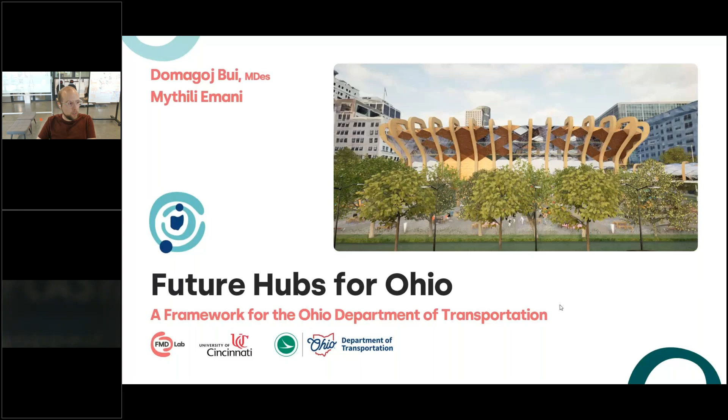We are from the University of Cincinnati. We both and the rest of the team work at the Future Mobility Design Lab, which is kind of like a consultancy at the Digital Futures Building, a Research 2030 initiative. We work with partners from government, industries, nonprofits, communities, wherever you can name it, to do human-centered research and design using our mixed research methods and technology to empower people and imagine a better quality of life in the future of Ohio, the US, and internationally.

This grant was a 1 year, $100,000 grant for mobility hubs for improving the access, safety, and economy in the future in Ohio. Based on this, we've also been able to secure 2 more ODOT grants for the next fiscal year worth 300,000. And all of this, of course, with our director. I can't forget to mention Professor Alejandro Lozano Robledo, who will hopefully be saying hello at the end of the presentation.

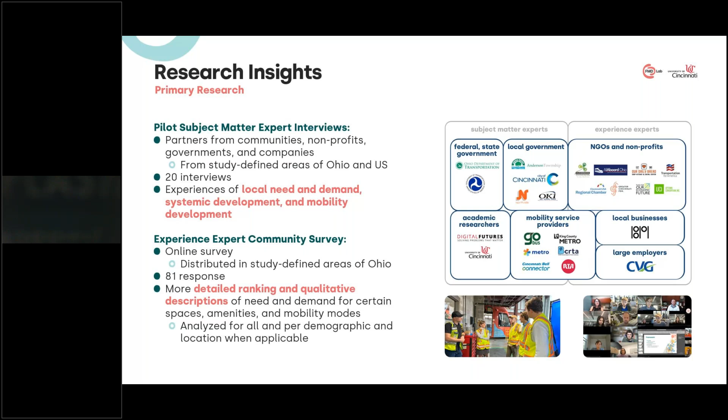Going from there into the community survey, or what we call experience experts, the users: it was an online survey with more than 80 responses all over Ohio. Thanks to Drive Ohio for helping distribute the survey, even in places where we couldn't reach otherwise. It produced a detailed ranking and qualitative descriptions of those needs and demands, which with analysis helped us define the structure of how we were going to proceed into the second phase of designing mobility hubs.

The third pillar of the research was multimodal data collection. We found transit and amenities data on two different databases, mapped them in GIS thanks to our partners from the UC Infrastructure Institute, and then together we weighed them using the survey and interview data I just covered, to weigh the mapped points of interest. This framework shows how the mapped data fed into a framework developed based on the weights from surveys and interviews, sifting through proximity.

So what should be located close to the hub, what should be connected to the hub, and what is missing in the location that should be addressed in the hub. It helped us find strong places in areas we considered for the case studies, to actually triangulate and get the actual location.

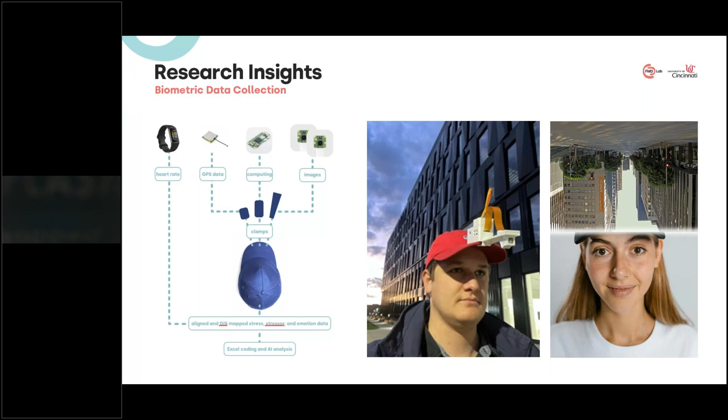With AI analysis, this tool can help us determine, while walking on the street, driving a car, or riding a bike, what the stressors are, so we can take the interventions with the mobility hubs further.

What we developed here is firstly the hubs matrix, based on three different parameters. First is land use, which we defined as rural, suburban, and urban based on research. The second is levels, based on the amount and purpose of trips: local, so a neighborhood hub, and central, more of a gateway downtown hub.

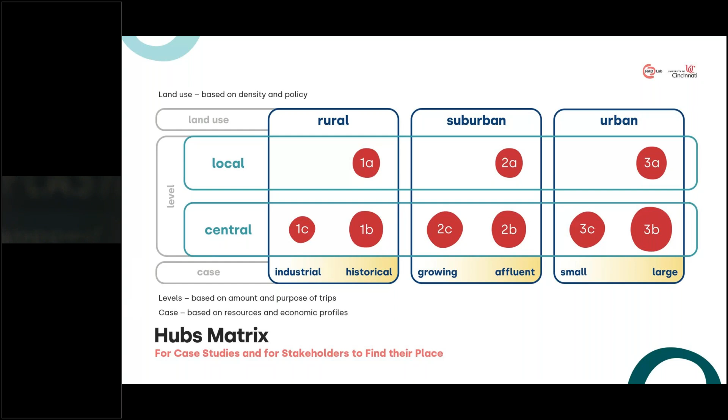And finally, the third one, case, based on resources and economic profiles: in the rural area, is it more of an industry-based economy, or a tourist, historical one? In suburban areas, is it a growing suburb or an affluent, stagnant suburb? In urban areas, is it a small city or a large city? Based on the data, we defined these to try to cover as much of Ohio as possible, so this matrix can later be used by anyone to define what kind of hub they need. More on that a bit later.

And finally, the translation framework. Moving on from research, we took the data and insights, developed the case study requirements, and used those requirements to make them visual, to make a flexible basis for what's going to be the best childcare example, the best bus stop example, etc. We framed it in the context of each hub, and you will see which those case studies are.

And then we used that to design and plan, iterating on the concepts for each case study, and finally created digital twins, simulations in 3D space, going live, of what those could look like. More on that here.

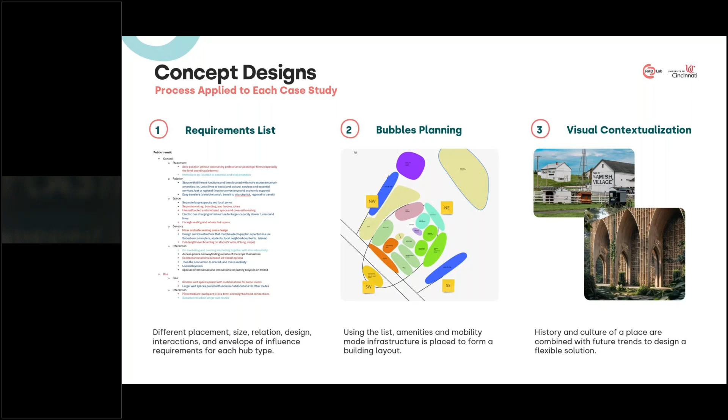First was a requirements list, bubbles planning, mapping the mobilities, mobility modes, and amenities in a footprint, and visual contextualization, using historical images of culture together with futuristic ones to imagine what these hubs could in the end look like.

We also used some new technology for this. For example, we used Gravity Sketch, a collaborative 3D sketch tool inside a virtual reality headset, where all of us together in the team could bring the 2D plans into three-dimensional life.

Second was StreetMix, which allows using NACTO guidelines to design street profiles for every specific street we wanted to. And finally, Vizcom, an AI tool that you can feed images into; we fed some very rough CAD models of our designs to see how they could look and whether we could go forward with the designs.

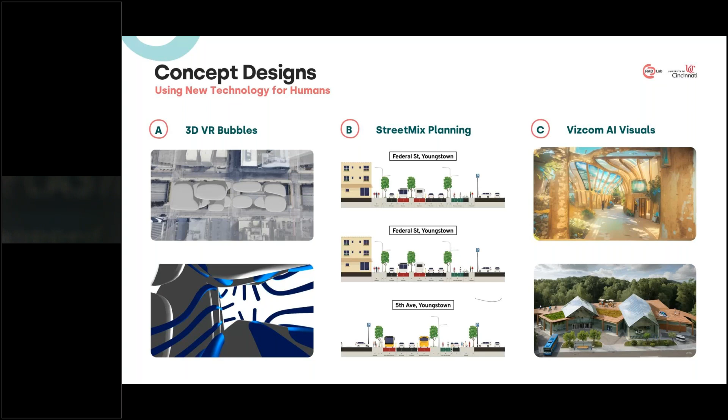Finally, the digital twins framework: the digital simulation of an existing space where we add our design, our concept, and new assets like new streets into it. We use it for research and design validation, and later to showcase to stakeholders, use in workshops, and for decision making as well.

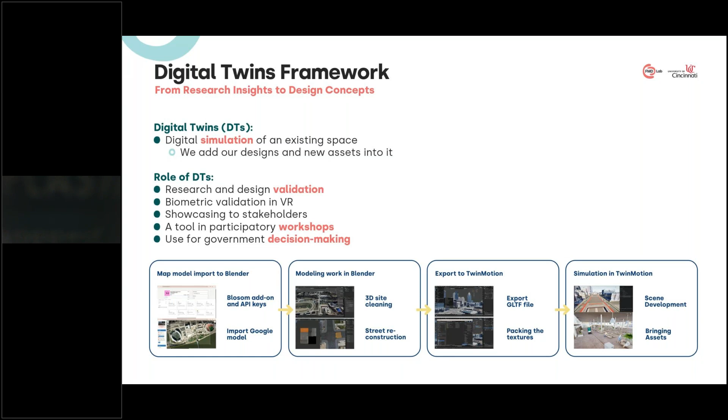You can see how this process went all the way from importing 3D Google models of the space, cleaning it, reconstructing the street, adding our concepts, and developing the scene with new assets.

And finally, before we go into case by case studies, in general, what are our recommendations? What did we learn from all of this? What did we conclude? You will see later, we developed a kind of toolkit, a playbook, which anyone can use, where all of this is in.

But what should these future hubs for Ohio be? Firstly, well-connected multimodal spaces and community-oriented places, both at the same time. What does that mean? Spaces where people can transfer, switch mobility modes safely and comfortably, but not just a transfer point, also a place for placemaking, where communities can connect, grow, relax, and have public space.

And they're important because they are community economic development tools. A lot of research shows just how much, especially even in rural areas—and this is probably one of the first case studies of this sort in the world, looking at mobility hub networks in rural areas and connecting rural, suburban, and urban areas. Especially in rural areas, bringing amenities and mobility closer to people is such a huge economic development tool.

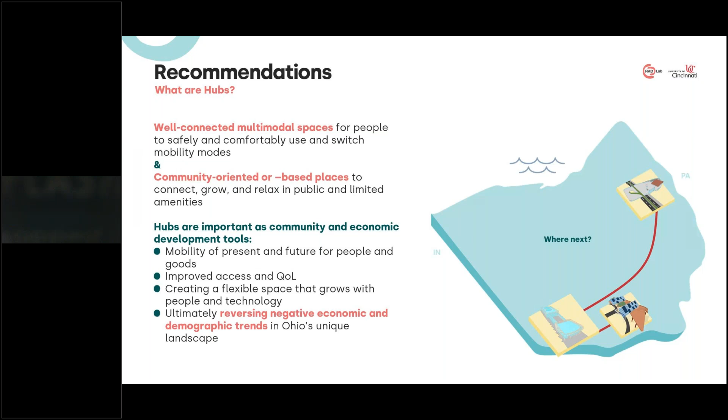Hi. The way that we envisioned the development of the hub was in almost a building blocks way, almost like Lego pieces layered and put together. So the process would start with choosing a location.

Using primary research data collection methods that Dom mentioned, like surveys, interviews, and site visits, we can determine the need and demand, which would ensure that the hub that we build is actually usable.

The second step would be to ensure that the hub design is based on user needs and the context of the location, so connecting the site to its surroundings. It's important for the hub to assimilate into the area and meet the needs of each community it serves. A hub designed without consideration of where it's being placed would lead to community residents not actually adopting it.

Third, mix and match the amenities and mobility—creating the right recipe with amenities and mobility modes in the hub we design. It's important to consider the demographic and transportation patterns that already exist in the area, so the hub provides relevant services. And choosing the right mobility modes is also important to provide flexibility and accessibility.

As an example, for a passenger switching from rail to bus, creating a space or connecting point for seamless transitions between modes of transport, or even creating a pleasant waiting space, is important. And fourth, creating a pleasant experience.

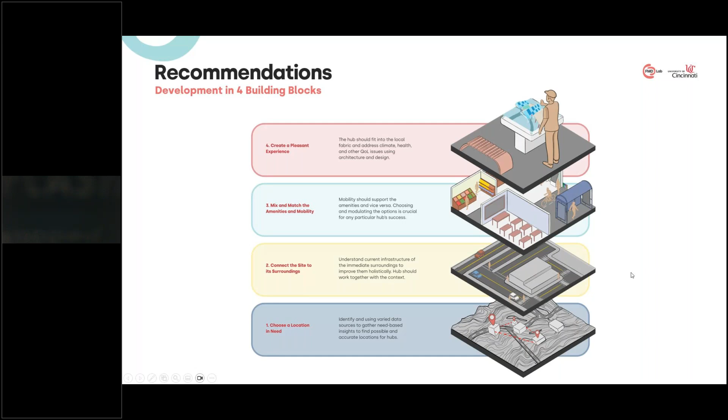So a few examples of how we took that building blocks framework into our case study: for choosing the locations, as Dom showed us before, multimodal data collection included mapping places of different amenities in the area, and an example of clustering to provide more local context.

An example of enhancement of the streets, which is slimming them, adding bike lanes with access to the sidewalk leading to the hub for accessibility. Live information is displayed, and the street generally flows better to existing and projected employment centers. This is an example of how we used connecting the street context to the place.

The third example was collecting best case examples from public spaces or hubs all around the world and finding emerging trends and technology to incorporate into the hub designs. And lastly, for the pleasant experience, incorporating intelligently designed products or services that support the ecosystem, like the area's wildlife, which makes the hub not just human centric but life centric.

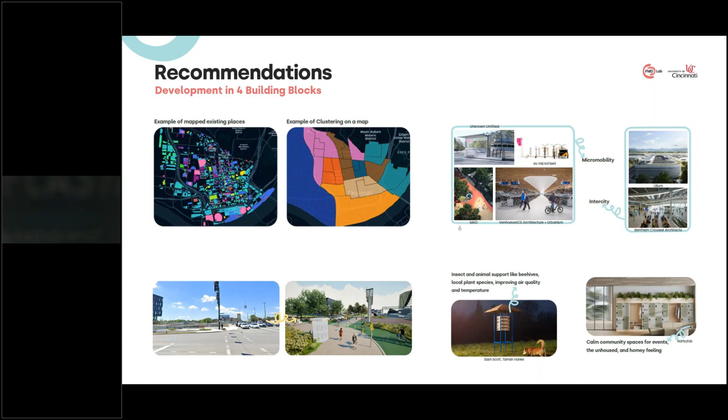Using the hub matrix that we introduced before, anyone could pinpoint themselves or their community on the matrix and receive a label, such as rural local, or suburban central. We created a checklist to illustrate what are must-haves, what are some things you should consider having, what would be nice to have, or what would not be needed in the land use type you've pinpointed yourself on.

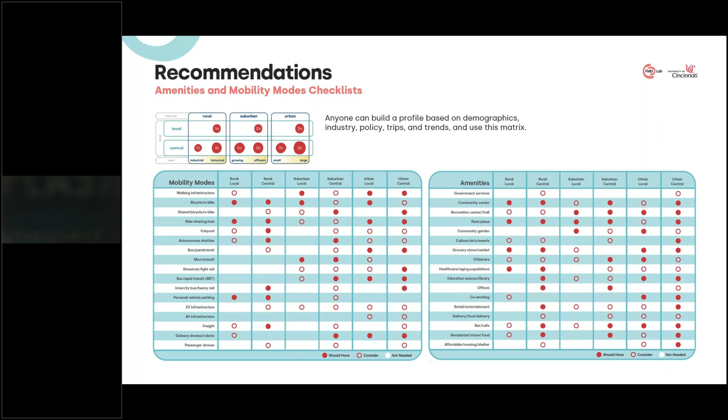Moving on to our final case study concepts that we visualize through digital twins. The first is our rural local historical case study, based in Millersburg. Millersburg was chosen for its rural mobility challenges and strong Amish community presence. We envisioned a small market-style hub that would improve connectivity while preserving the cultural dynamics of the area. It would have features like intuitive wayfinding, streetscape improvements like raised crosswalks, natural green barriers to enhance walkability, and co-location to amenities like grocery stores or pharmacies. All of these features would make the hub a social and economic anchor.

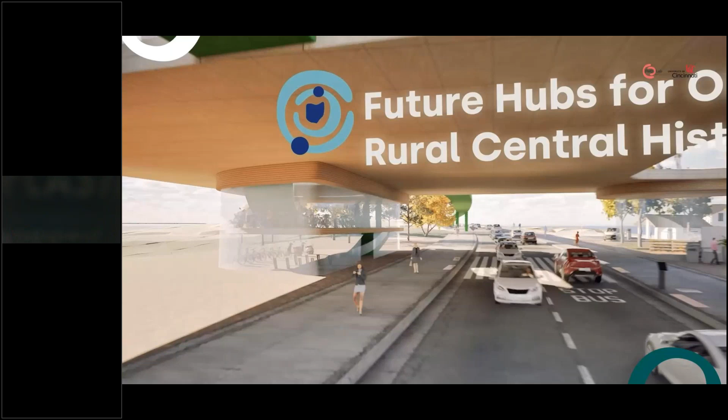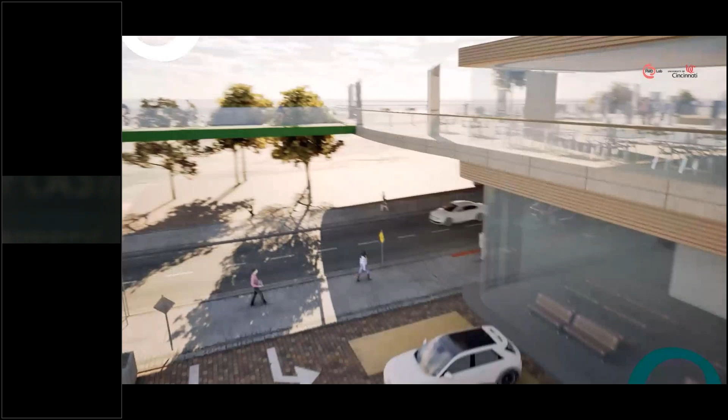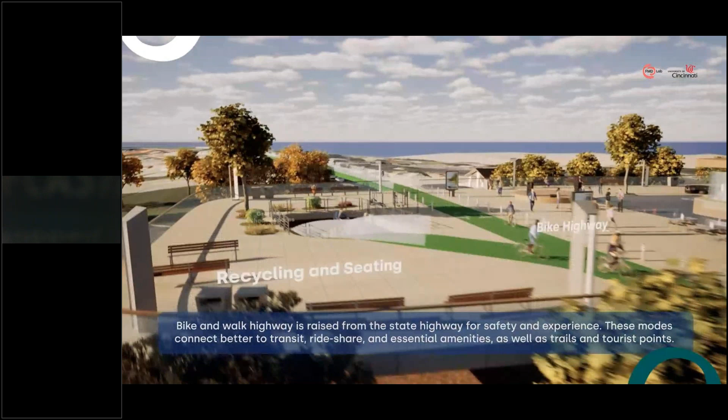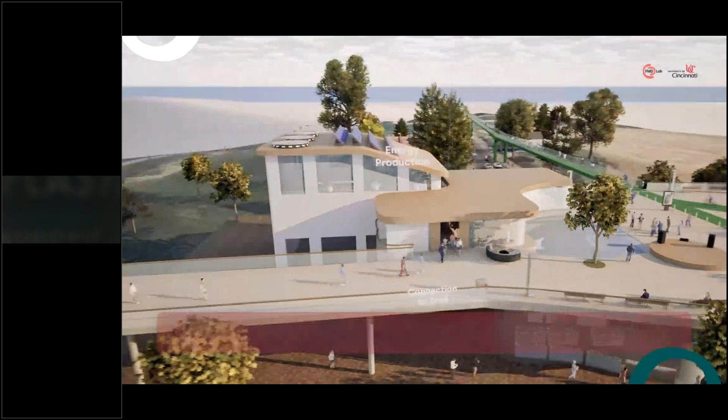Our next one is our rural historical central hub, based in Berlin, Ohio. It would contain mobility modes and amenities: parking for bikes, a well-designed transit area, a public space open and flexible for events or pop-ups, a community center or space, and accessible transportation options. An example is a bike highway connecting the hub to the town and other places, an open space for events and local businesses. The hub would also be connected to activities like a nearby trail, a space for delivery through drones, and incorporating green energy production like solar panels.

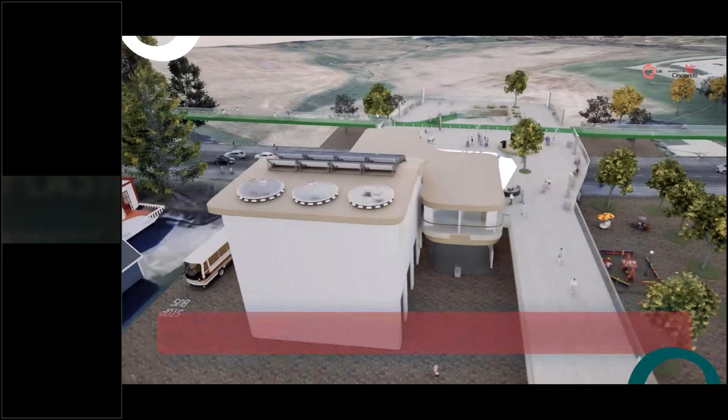Our next case study is the Rural Central Industrial, based in Mount Gilead, Ohio. This area was selected because of its role as a center in a predominantly rural area. It serves as a key hub for local industries like healthcare, manufacturing, and education. Creating a hub here would offer a connection point for surrounding rural areas to address their transportation needs for both the workforce and the residents that live there.

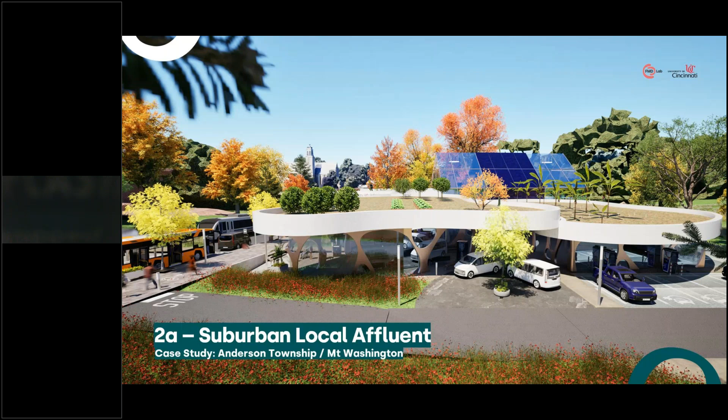Back to me a little bit. We're starting now with our three case studies in suburban areas. Suburban areas we defined as cities of a certain size and density of population that are not economic centers on their own, but are very connected to large cities in their vicinity.

The first one is Anderson Township, a city next to Cincinnati, close to us. We start with a local affluent hub, which has everything from better transit, especially microtransit and autonomous shuttle connections, because in suburban areas like this where cars are abundant and available, offering a level more of convenience using transit definitely ups the possibilities of multimodal success.

So everything from a specific, very nice waiting area for ride sharing such as Uber and Lyft, to utilizing a lot of carpooling, to community gardens and grocery stores to fill out food deserts in the area, and childcare to fill out childcare deserts in the area. All the way to incorporating electric vehicle charging spots, public spaces, and connections to nature and trails in the vicinity.

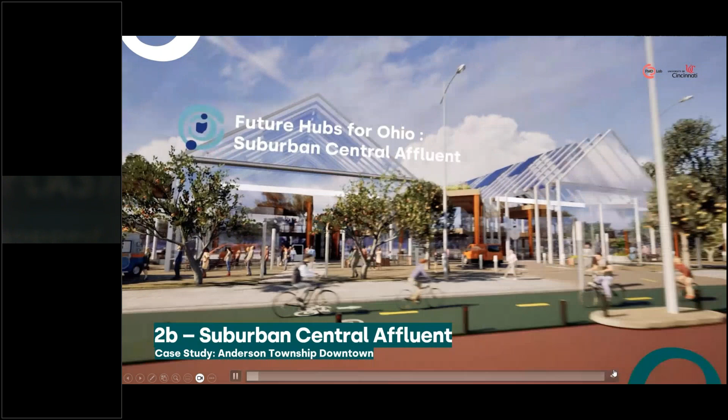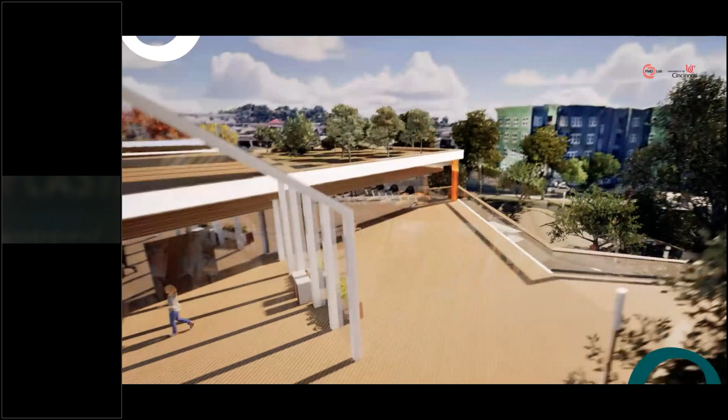But that is even more apparent in our main suburban hub, in downtown Anderson Township. This is also an example of our recommendation of doing redevelopment instead of building completely anew. For example, this one connects to a trail and a current community center building, and also reutilizes or redevelops dilapidated buildings currently in the space.

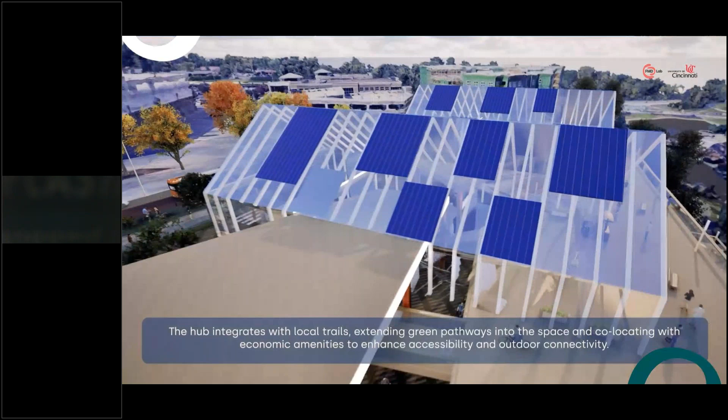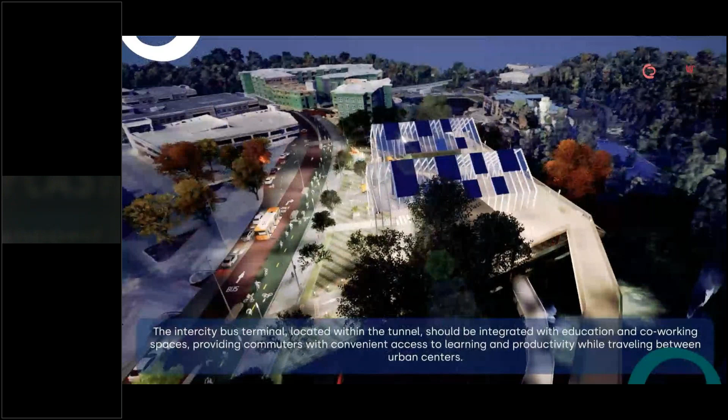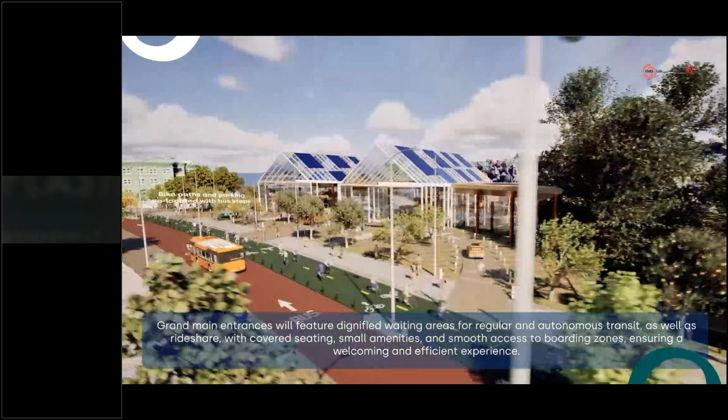It utilizes a lot of pop-ups for local shops and local restaurants. It offers a level of flexibility, which was a really big term for us in developing all of these hubs, because not only does it have to grow with time with the community, but it also has to offer that in areas like suburban areas, where there aren't a lot of things that are there 24/7, 365 days a year. So offering flexible space where businesses can come and promote without necessarily having to pay for stores all of the time.

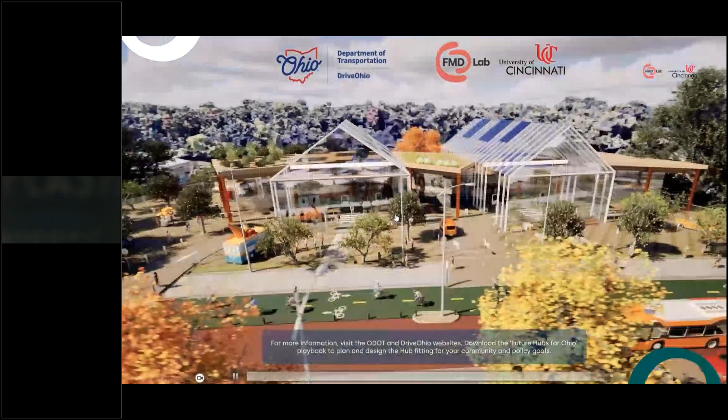All the way to, for example, having trees that bear fruits in front of the building, which offer free food.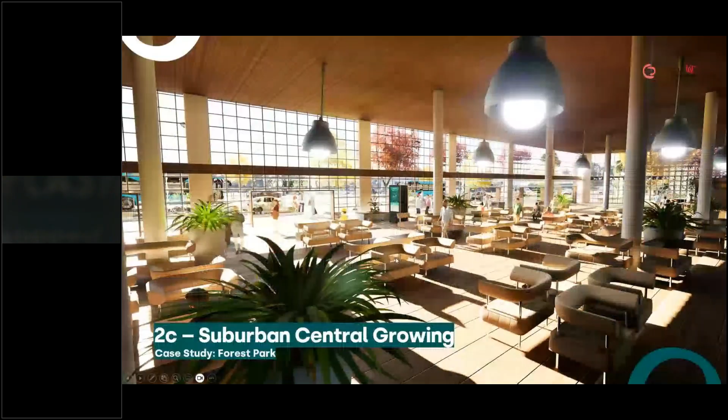Finally, suburban central in a growing suburb of Forest Park, north of Cincinnati, a historically very diverse suburb that is currently, because of that, fastly growing. We focused here mostly on getting amenities that are missing, such as a larger library, and better and bigger waiting spaces for all different types of mobility, from buses that already exist there, since it's a lower income level area.

Transit is more of a primary method here than in Anderson Township, so very convenient waiting areas for that, for carpool, for rideshare, all the way to reutilizing a lot of what is already out there. It's not pictured here, but there's currently a police station, a community center, and a rec center there. A rec center is a big thing for suburban areas, so incorporating a rec center, just covering current tennis courts, would be significant. And then also a lot for the elderly, so care, healthcare, etc., is something we definitely considered here.

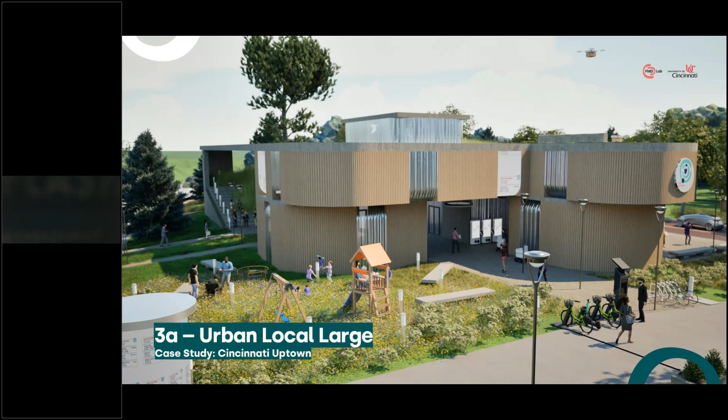So from here, we move on to our urban case studies. Our first one is the Urban Local Large, located in uptown Cincinnati, just north of downtown. It would serve as a key urban local hub since the location makes it optimum for a blend of residential, commercial, and institutional spaces.

It's located close to UC spaces, close to residential spaces around UC and otherwise, and commercial spaces too. It's well positioned to address local mobility needs, and the hub would focus on enhancing connectivity to nearby educational institutions, healthcare facilities, and public amenities, offering more sustainable and accessible transportation options for both residents and visitors.

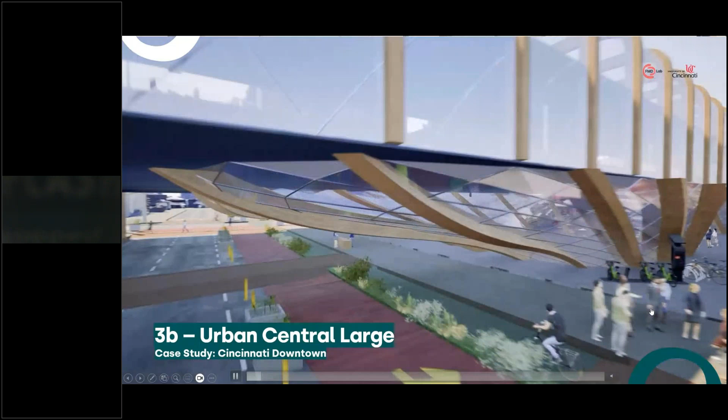And of course, giving a lot of new green space, which is very important in cities. That is especially true also for our downtown Cincinnati hub, the Urban Central Large, the biggest one we've proposed here because it's for a large city.

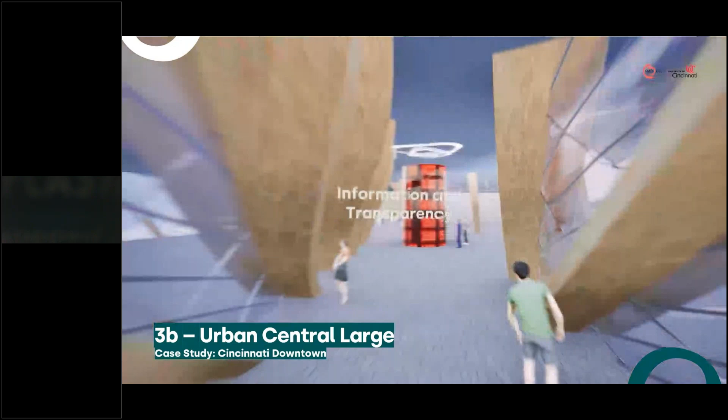So here, the location is really interesting. There's already a sunken highway going right through downtown Cincinnati—not really like Boston's Big Dig, but kind of close—covering 2 blocks of that highway and building a large central hub. There's already a below-ground transit center, unused for Cincinnati Metro, that could be reutilized.

For a lot of inner-city transportation connecting to the rail station, and autonomous vehicles, because then they're kind of separated from the rest of the traffic, all the way to giving a lot more space to the public.

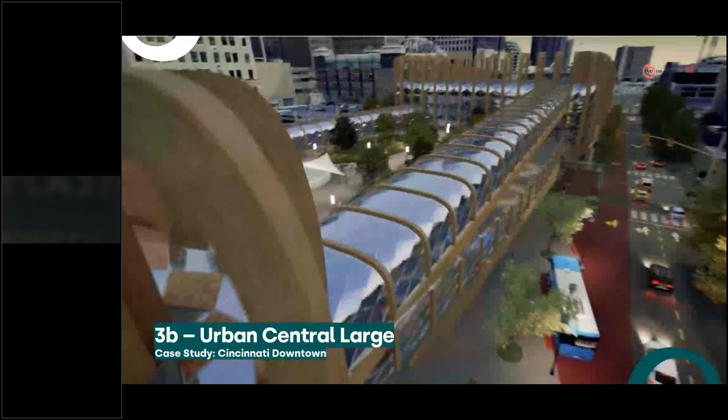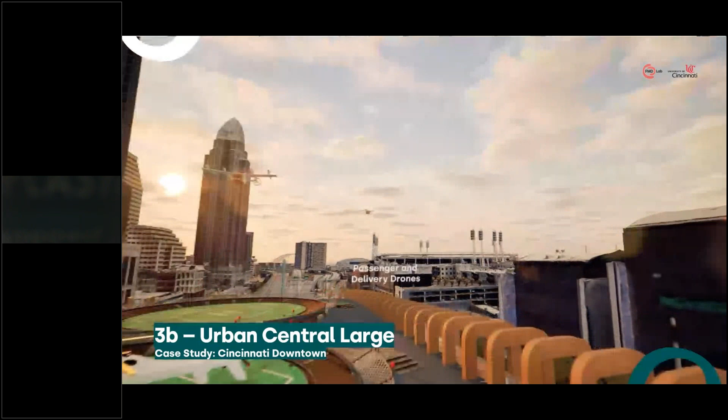Bus system, to public spaces like this second-level park, which also serves as kind of a viewpoint area, not covering the view down Vine Street all the way to the Ohio River. Having a park, with spaces dedicated for children, spaces dedicated for events, and a lot of vertiports for passenger and delivery drones.

Having it positioned with walls and sound barriers in a way that it doesn't impede the quality of life in nearby residential buildings.

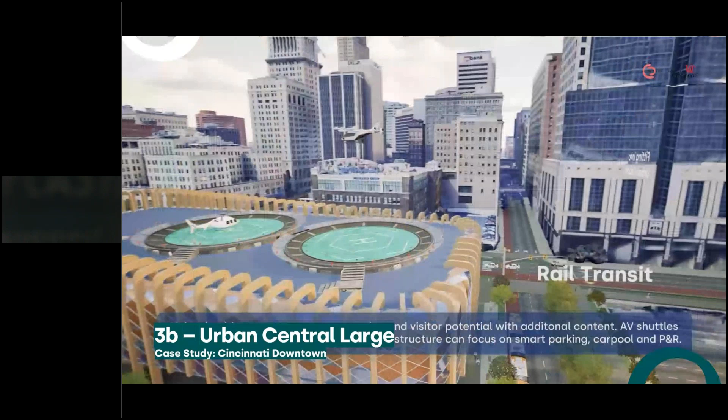A lot of redesign of the streets to be safer, to be multimodal, utilizing where the current bus lines go, where the current streetcar line goes, all the way to how we designed the hub itself and the facade—for example, how we propose to put glass panels versus non-transparent panels for it to be more energy efficient.

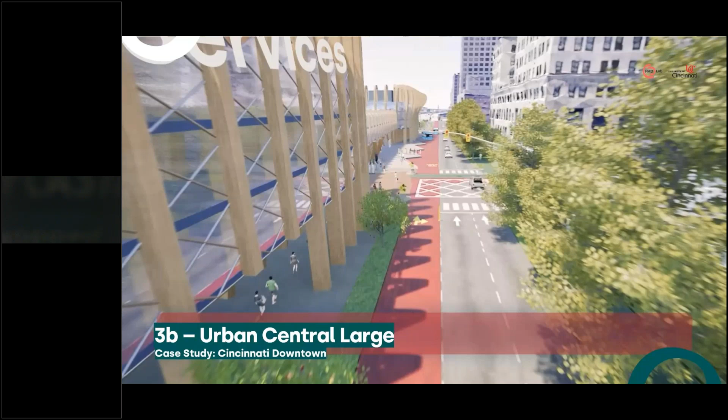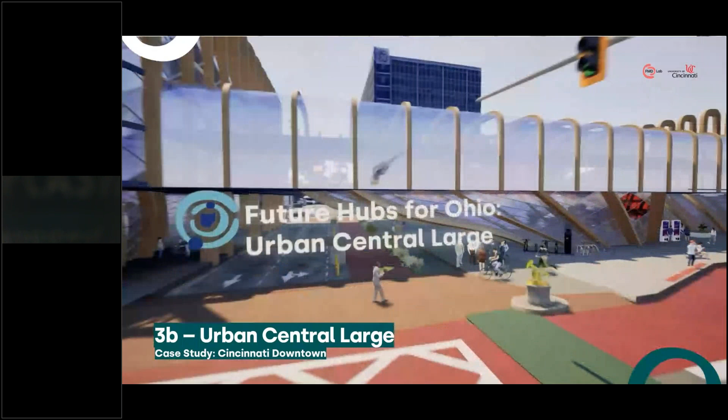So where the sun goes in the summer to be more covered, and in the winter to be more open, all the way to more flexible spaces on the street and in the hub itself, having covered sidewalks to shield from the elements, and a lot of digital and multi-sensory information being given out.

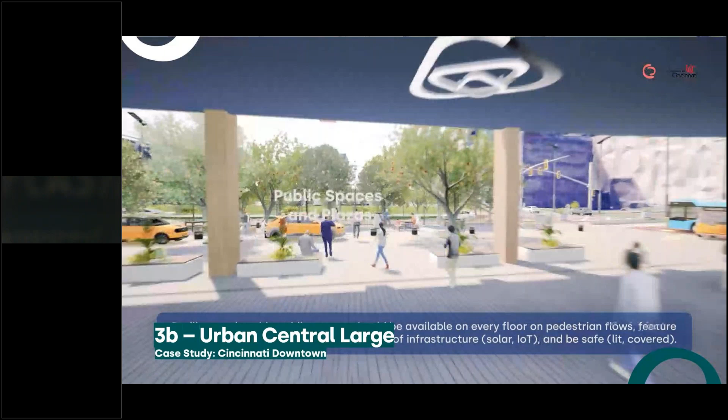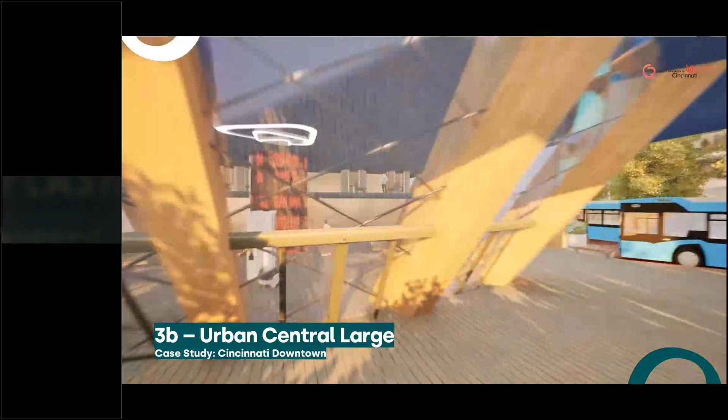So really all the levels we considered here, from how we chose the location, how we decided to connect it to the spaces currently existing around it, from residential to business, in a way that it can enhance even the businesses not in the hub but around it, to how the mobility is co-located with the amenities, which is really important, and we discussed that a lot in our report as well.

So there are certain amenities, certain things that should be connected more with the bus, and certain things that should be connected more with rideshare, because different types of users are more inclined to use different types of amenities. So it really goes over all four building blocks that we propose for the hub.

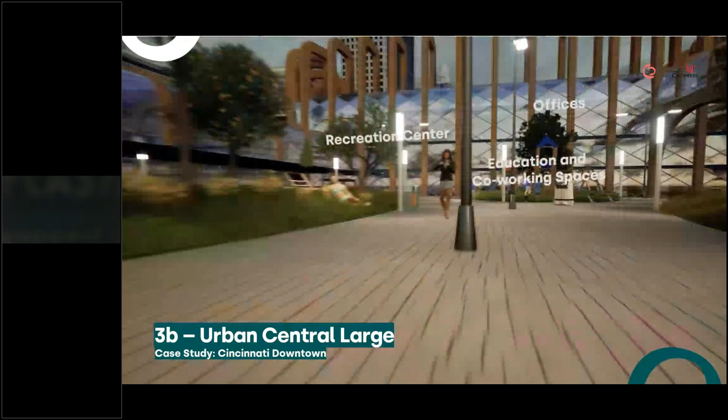And before we go to the last hub, which Maithili will cover, I just want to use this opportunity to really just reiterate why this was important.

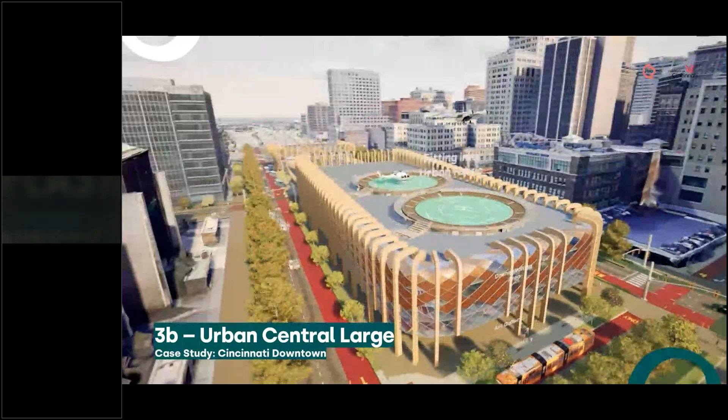All of these 9 hubs, all of these 9 concepts, case studies, were designed not so they serve as 'okay, we're going to build this right now, right here,' but as a visual show of how these checklists, these building blocks, these requirements and recommendations would work in some very specific places around Ohio that can be representative of other places too.

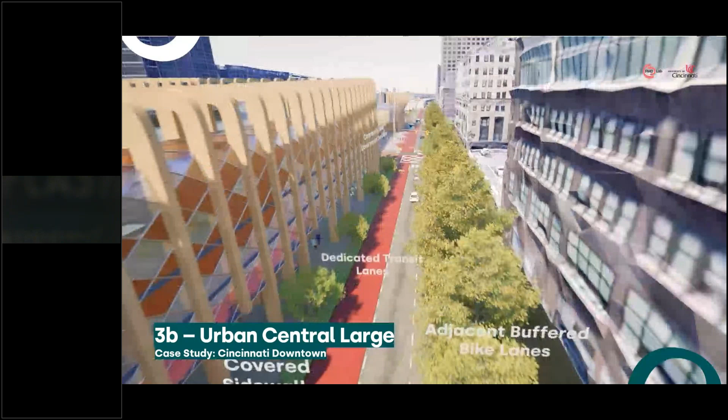So that communities, mayors, nonprofits, companies can come, see this, see how it should be developed, because visual—especially when it's simulated like this—from our experience works much better than just having a report. So this is the true power of having something visual like this, and just even designing something like these concepts for these case studies. And I will let Maithili cover the last one.

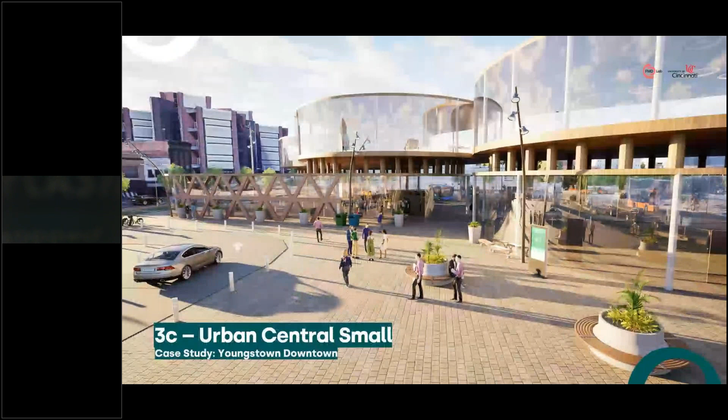So our last case study is the Urban Central Small, located in downtown Youngstown. We chose this as our case study for this land use label since it's a smaller city with a concentrated core of commerce, industry, and public services.

It has a growing population and potential to become a much bigger place, serving as a focal point for local businesses, government services, and community spaces. The design is open and flexible for community spots and event spaces, with commerce options like shops integrated into the building. One of the biggest changes we made was the streetscape, to make it much more walkable and accessible to residents than the area is right now. It's also built to grow with the city, designed taking into consideration local culture and architecture so it assimilates perfectly with its surroundings.

Lastly, as an amalgamation of all our work, we created a playbook, a step-by-step guide designed to help communities plan and implement mobility hubs. It breaks down complex urban planning concepts, ideas, and frameworks into accessible, actionable insights for residents, planners, local organizations, or anyone who wants to do better for their community or explore what could be possible, promoting more connected, inclusive, and people-centered communities.

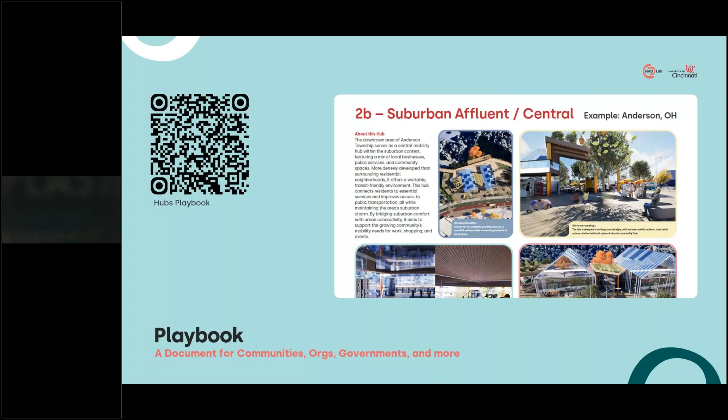Before questions, I see some have come in, so we'll address those shortly. But reiterating, we did receive next grants with ODOT and Drive Ohio, STAR grants for '25-'26, one of which uses a lot of what we did here, using the hubs as digital twins in immersive STEAM educational toolkits for K to 12, teaching educators how to use VR headsets and that kind of technology to develop workforce for future mobility technology, and a drone-in-a-box system, which will be really interesting.

Michael is working on that one. For us, this means advancing technical and participatory capabilities, really exploring what we can do with surveys, interviews, and workshops, learning more about how to conduct those and how to do playbooks and toolkits like this. Our next step is creating an interactive playbook, almost like a car configurator but for hubs, that would be available as a website to stakeholders. We're currently in the process of developing that, for you, to start a conversation or the development of projects like these.

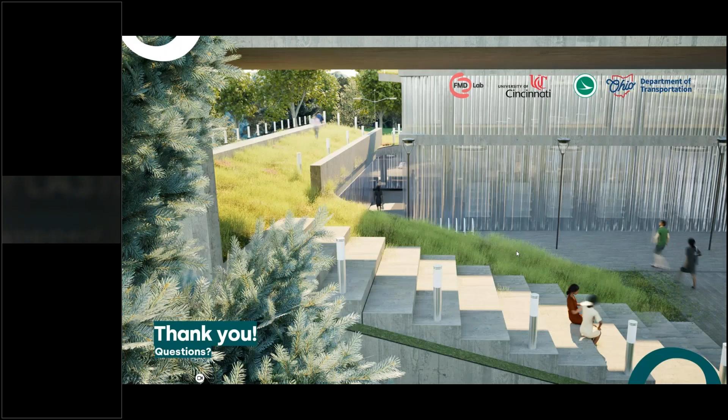The question is about trees that bear fruit, attracting bees, ants, etc., that are high maintenance in a non-rural area. That's the first part of the question. Now let me just go back a little bit to that part.

For example, here, this is a suburban one. So in general, this is a really cool recommendation that we've discovered a lot of places in Europe do. This is something that's happening in Athens in Greece, in Paris, and not just around the hubs, but actually in a lot of residential streets. The first goal is to have that as the first line of defense against hunger, because it's provided by the city and anyone can use it in a public space. It is a little bit more maintenance, but not too much.

And on the part of, for example, bugs, that is the second goal, actually of bringing nature a little bit back into the cities. A lot of research done in the past 5 to 10 years has been about this.

Especially in American cities, but also around Europe and Asia, this very strict zoning, and how residential streets are done compared to downtown streets compared to industrial streets, and the buildings as well, has proven to be a pretty much failed concept. Blending is the future—blending the land use, blending the zoning, blending the streetscapes and how we do them.